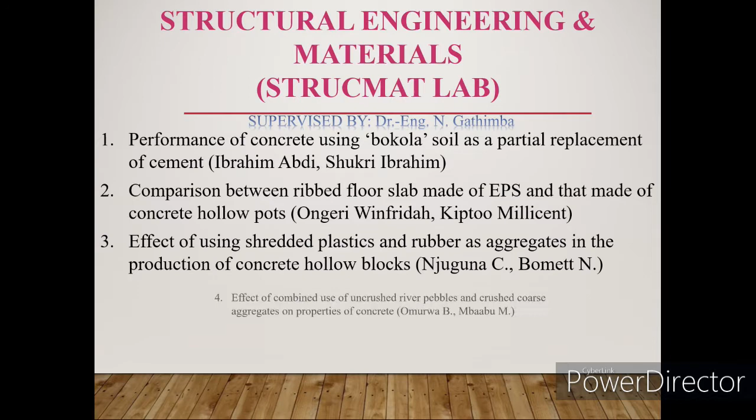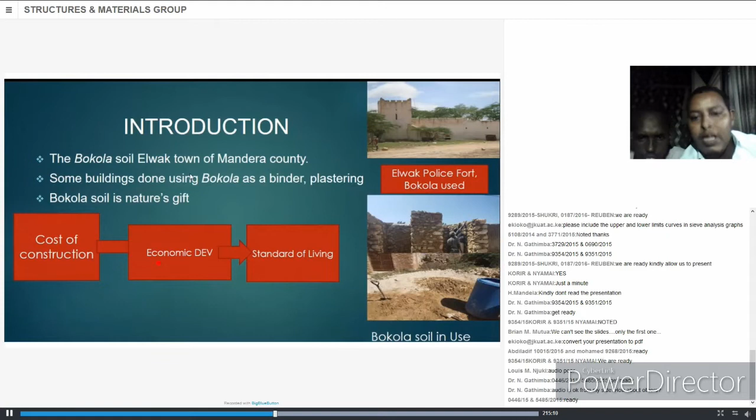Introduction: this is a local soil found in the Elwak town of Mandera County. The existing scenario is that some buildings, like the one on the right, were built using this soil as a binder. People also use it for plastering. This soil is naturally available, so we think it will reduce the cost of construction, leading to economic development, hence raising the standard of living.

Problem statement: some of the problems include the production and exploitation cost of cementitious material due to poor roads, and the cost in Mandera is twice that of Nairobi. Depletion of natural resources due to excessive use of cementitious material increases carbon footprint. Also, because people are already using this soil, there is a lack of specification and standardization for local material, so we needed to do proper tests.

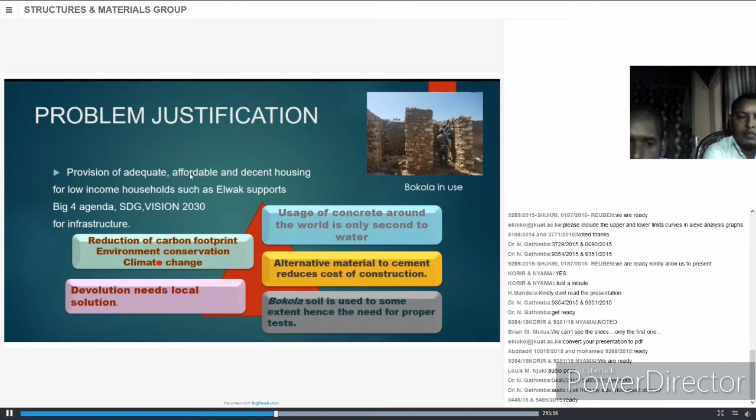The aim will be to increase... devolution also needs local solutions. Bokola is used to some extent, hence the need for proper tests.

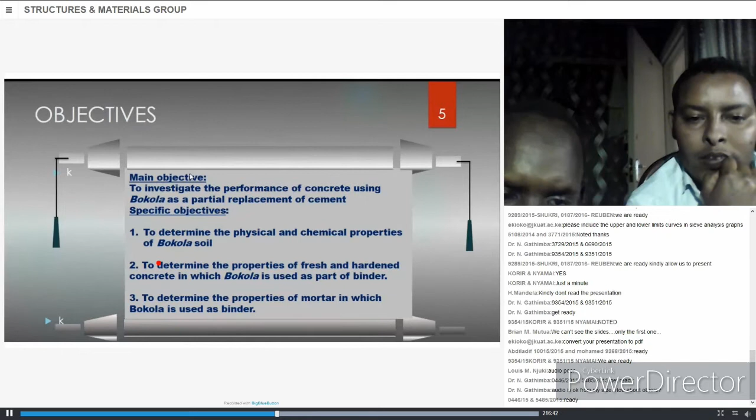Our main objective is to investigate the performance of concrete using bokola as partial replacement of cement. Specific objectives: one, to determine the physical and chemical properties of bokola soil. Two, to determine the properties of fresh and hardened concrete in which bokola is used as part of binder. Three, to determine the properties of mortar in which bokola is used as binder.

Our research questions: the first one is on strength. Does the concrete made of bokola attain the required strength within 28 days? To what extent can bokola be used in place of cement in making concrete? And economically, does the use of bokola make housing and infrastructure more affordable?

Our limitations: number one is on chemical analysis. We have not stressed much on the chemical analysis of bokola. We only tested for basic oxides, and the class of concrete is only limited to class 20 because of the new material, and the number of representative samples is minimized to from 0 to 20%.

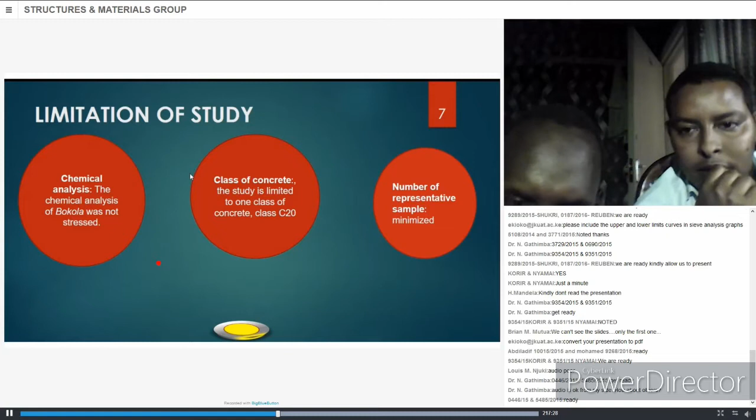Lime was also done as partial replacement of cement by other researchers. They replaced from 0 to 35% in concrete and 0 to 100% in mortar. The strength increased up to 15%, after which it kept on decreasing.

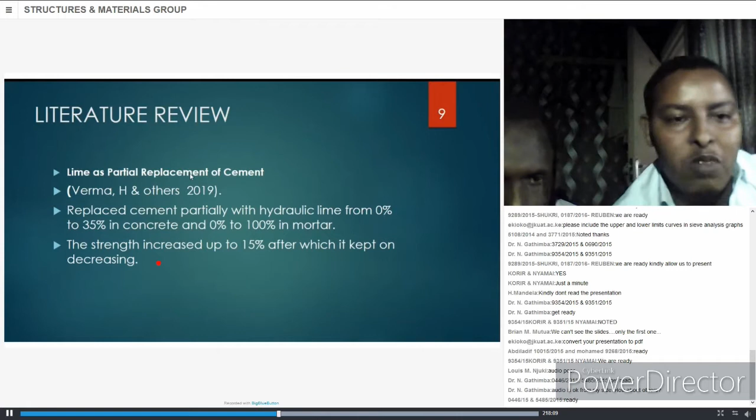Zeolite and tuff as partial replacement of cement were also studied. Researchers found that at 5, 10, and 15% of fine aggregates, 15% was successful, after which it wasn't.

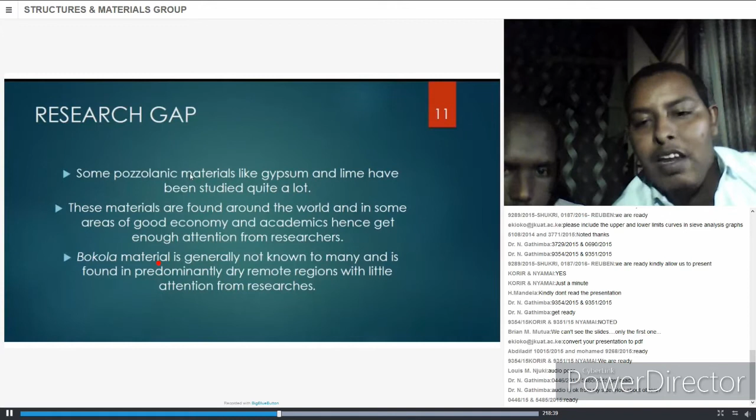Research gap: some pozzolanic materials like gypsum and lime have been studied quite a lot. We realize these materials are found around the world and in areas of good economy and academics, hence get enough attention from researchers. Bokola material is generally not known to many and is found in predominantly dry, remote regions with little attention from researchers, hence the need for a local solution from us.

Methodology: this is our roadmap. We started by collecting the sample and did a chemical analysis for basic oxides, after which we went to the properties of bokola. Here we did specific gravity, fineness, consistency, and setting time.

Then we did tests on mortar, and then on fresh concrete, where we did workability, especially the slump test. Then on hardened concrete, we did compressive strength, tensile strength, density, and water absorption. And at the end, we did analysis and comparison.

Now on to results, data analysis and discussion. The chemical composition of this bokola soil was analyzed using an XRF test. We realized that it contained a very large amount of sulfur, 43.8%, against cement's 1.9%. This high amount of sulfur, unusual in cement, could be from calcium sulfate, making this material closer to gypsum than cement really.

It contains a good amount of calcium oxide, 35% against cement's 42%, and silica 15% against 40%. These two compounds are very important in cement because they bring the binding effect, and the silicon and aluminum produce a firm and hard mass, hence the strength development.

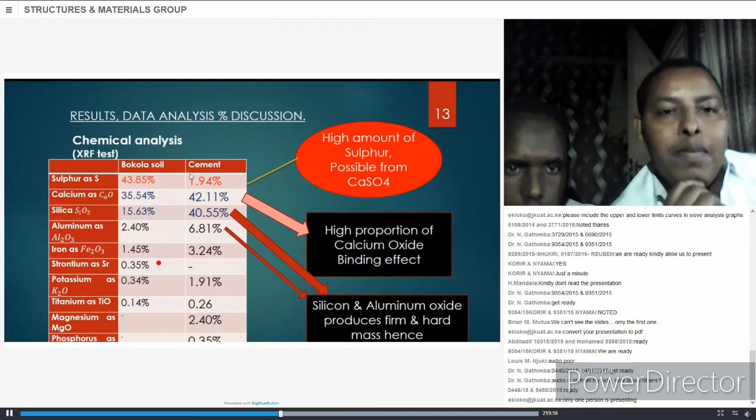Properties of bokola soil: we did the standard consistency test and realized that bokola required 227 milliliters of water to reach consistency, against the same amount of cement requiring 120. This means bokola needs more water than cement, and is more plastic.

Setting time: the initial set for cement is 150 minutes, bokola is 307. Final setting for cement is 295, the other one is 582 minutes. Although both satisfied the ASTM requirement of not less than 45 minutes and not more than 10 hours, we realized bokola needed more time to settle, because of less calcium oxide and less silica. This means less hydration and fewer reactants.

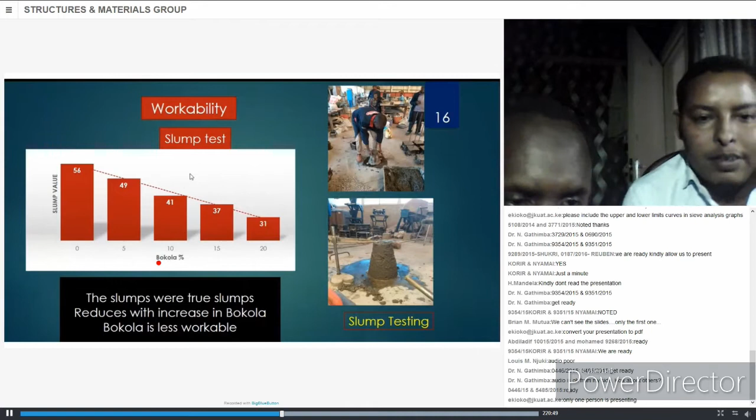Workability: the workability of concrete in which we use bokola reduces. The slumps were true, but the reduction may be due to the consistency of bokola, which needs more water to be consistent.

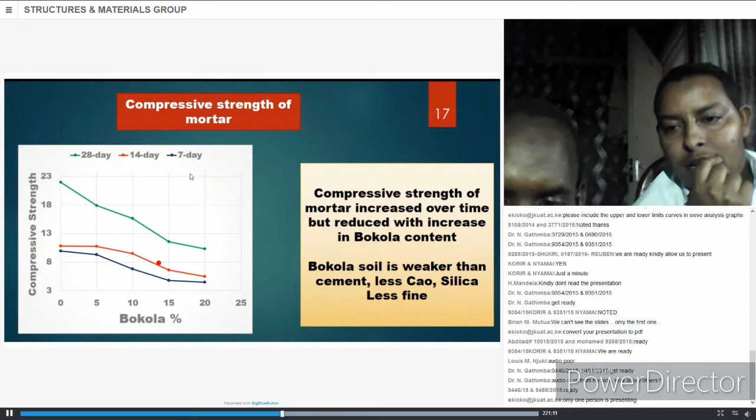Compressive strength: the compressive strength of mortar also increased with time, but reduced with increase in bokola content. Bokola is weaker than cement due to less calcium oxide and silica, and it is also less fine.

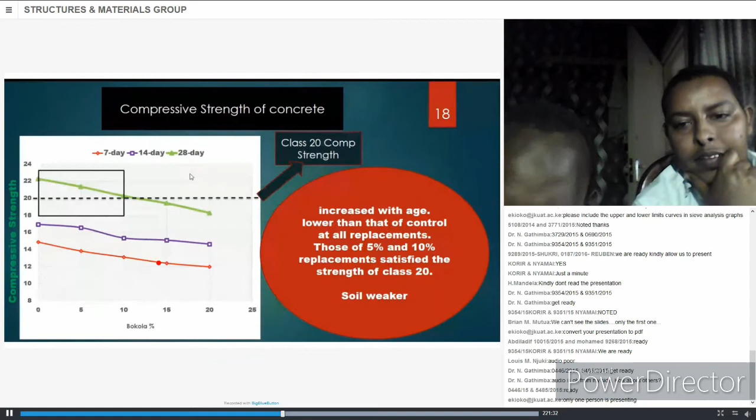The compressive strength of concrete also reduced with increase in bokola content, but increased with time and age. It is lower than that of the control at all replacement levels. Those with 5 and 10% replacement satisfied the strength of class 20, which shows the bokola soil is weaker.

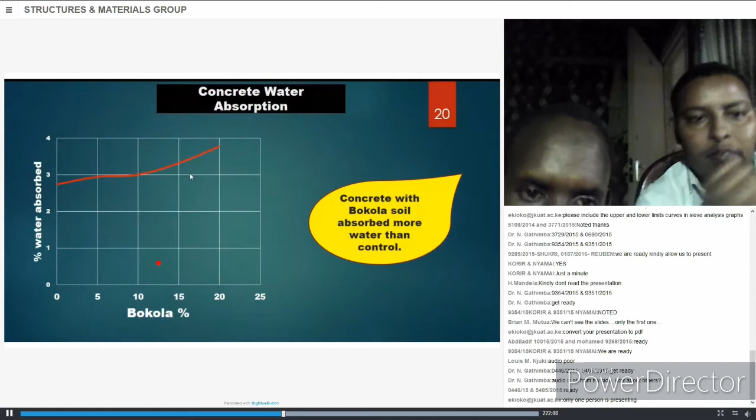Onto conclusion and recommendation. Based on objective number 1, we concluded that bokola soil contains elements of cement and can show comparable properties. This includes setting time and fineness, all of which we showed the values for. Bokola mortar also had compressive strength reaching up to 17 newtons per square millimeter, which is generally good.

The use of this material can make housing more affordable, especially in large projects. The compressive strength when this material is used as a binder is okay up to and including 10% replacement.

Onto recommendations: based on this study, we recommend cement replacement with this material up to 10%. We also recommend it be used as a binder and filler because of its bonding effect. Since people are already using it for plastering, we think it's okay to continue, but we recommend using bokola material as a retarding admixture because this soil is found in areas of high temperature, so we need to use it to slow the setting of cement due to high temperature. We also recommend a future study for use in structural elements.

Let's get the comment from the panel members. There was a comment by Engineer Kioko, or it was an observation: the presentation was dominated by one person, so I hope you rectified that towards the end. I have one observation. I can comment that they have quality presentation slides. Yeah, their presentation is good. Thank you, sir.

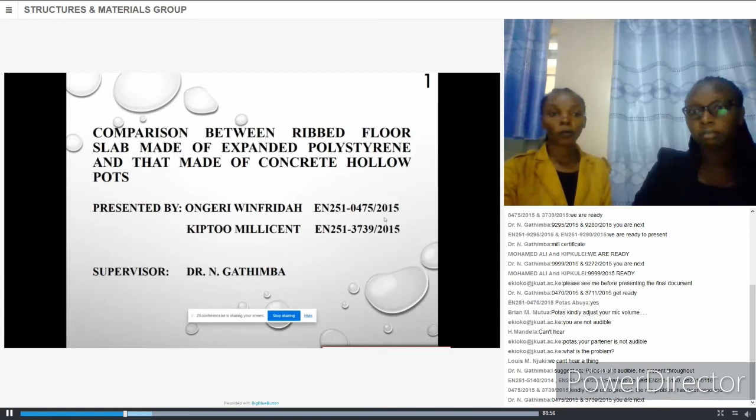My name is Kiptoo and she's Ongeri, and our project title is Comparison Between Ribbed Floor Slab Made of Expanded Polystyrene and That Made of Concrete Hollow Pots. Background study: in order to reduce the dead load in the rib slab, use of lightweight material in construction is necessary, such as concrete hollow pots and EPS, as shown below. Here is an example of an EPS floor slab, and to your left you can see an exact slab.

Problem statement: due to the increase in dead load from using concrete hollow pots in the rib slab, it leads to increased load-bearing element sizes, which may lead to increased cost of the overall building. In order to curb this problem, we use lightweight material, hence reducing the sizes of the load-bearing elements and the amount of concrete and reinforcement required.

For our objectives, the main objective is the comparison between EPS and that made of concrete hollow pots.

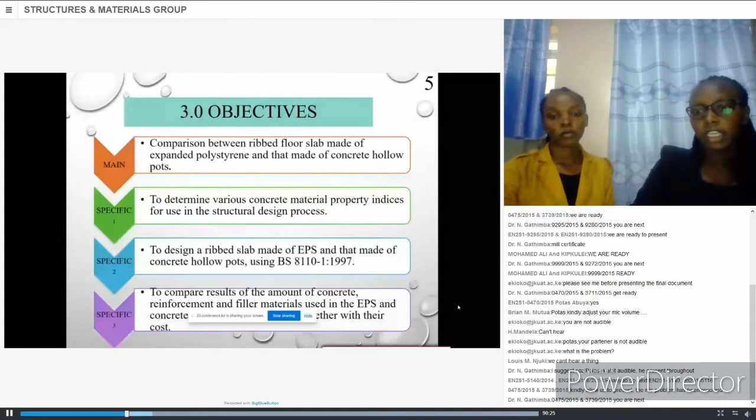The limitations encountered were that only one size of concrete hollow pot was factored in, only one slab thickness and class 25 concrete was used, and the cost of labor and transport were not covered.

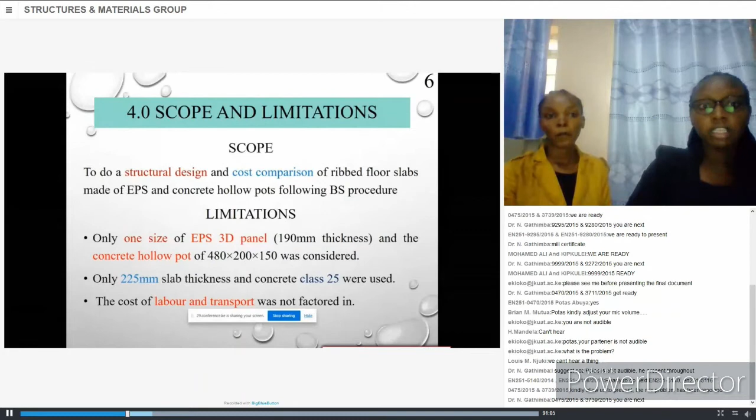For the research gap, however, there is no study comparing the EPS and the concrete hollow pots.

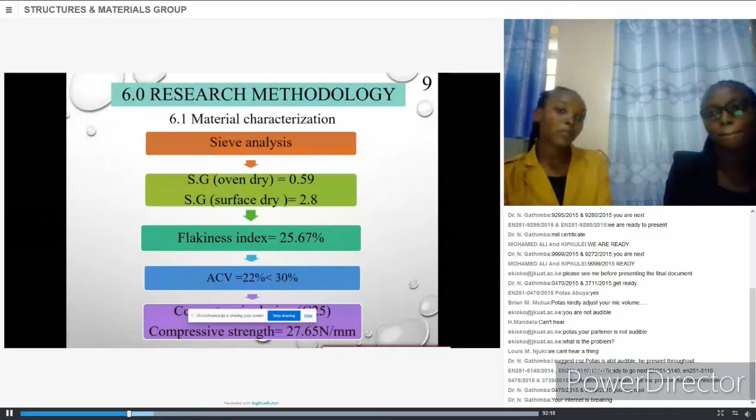For the research methodology, we did the sieve analysis, specific gravity, flakiness index, and strength of class 25 concrete, found to be 27.65. In our design of rib slabs with EPS and concrete hollow pots, we calculated the shear force, and the reinforcement provided for EPS was 1T16 top and 1T10 plus 1T12 bottom, while for the hollow pots it was 3T10 top and 2T12 bottom.

For the results, the expanded polystyrene had a density of 15 kg per cubic meter, and the hollow pot had a mass of 17.6. For the reinforcement...

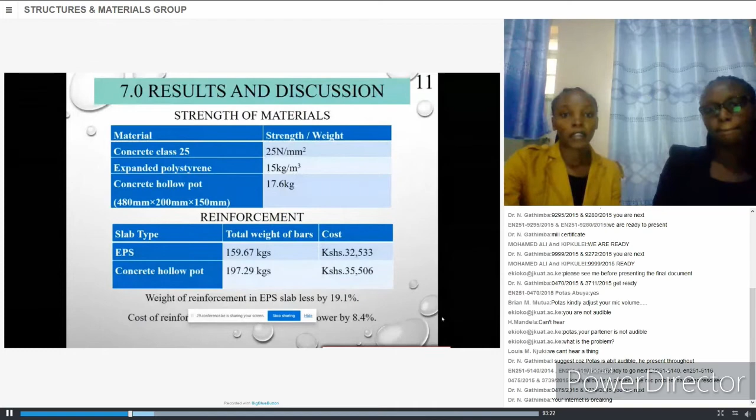The reinforcement was less by 19.1%, and the cost of EPS was lower by 8.4%. The volume of concrete in EPS was 0.3%, and the cost of EPS in the slab was less by 15.7% compared to the total cost, though the total cost of EPS was higher by 62.8%. In conclusion, the properties were satisfactory.

The rib slab design was also successful using the BS codes. The overall cost of using EPS was 112,000, while that of using hollow pot was 87,000. Due to the high cost of EPS panels, the cost of slab construction will be higher.

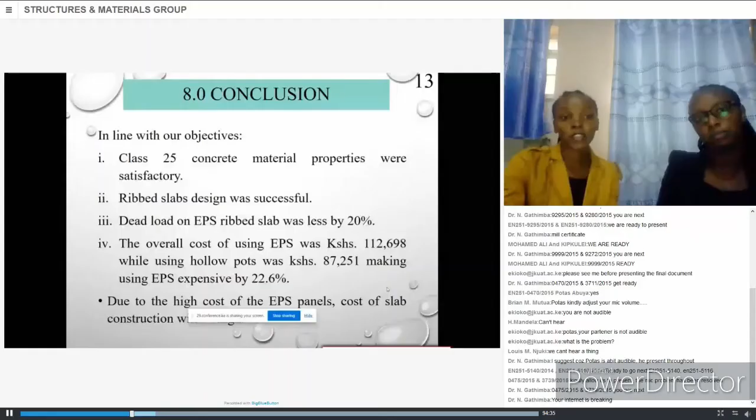We recommend that when using EPS and concrete hollow pots as filler material for slabs, one should know the overall loading and cost of each in calculating the total, in order to know the precise total cost.

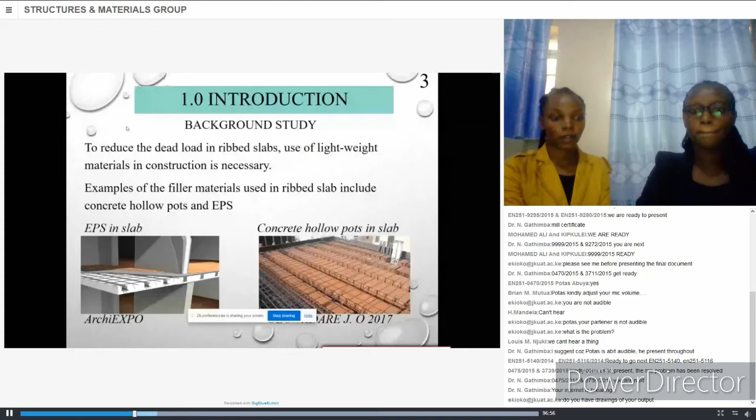Yes, we do. We have the drawings. It's in the main document. Okay, and then there is a question by Engineer Mutua.

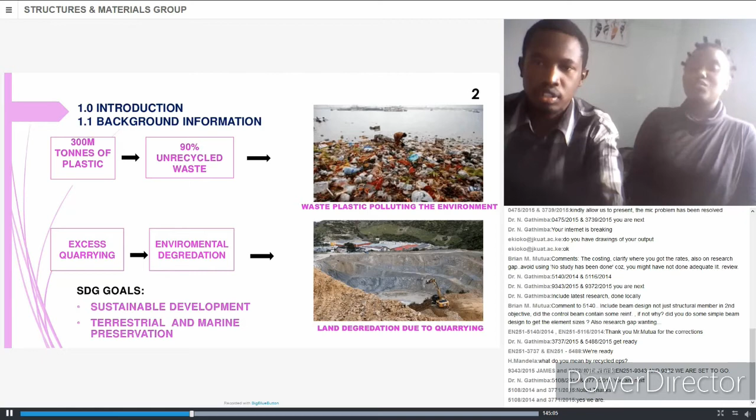All this is not in line with our SDG goals, which are to promote sustainable development and terrestrial and marine preservation. Currently in our country, Kenya, in 2018 we had a housing deficit of 2 million housing units, and this number grows by 250,000 units every year. So we have a deficiency in housing, a pollution menace, and a degrading ecosystem.

So how do we move from this to sustainable development and a clean environment? Plastic rubber hollow blocks could be a solution to this, because we are using recycled materials which otherwise would pollute our environment, and also providing cheaper housing.

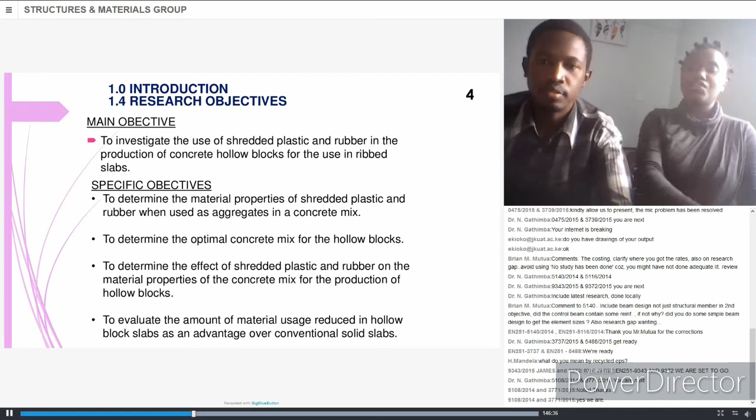Our main objective is to use shredded plastic and rubber in production of concrete hollow blocks for use in rib slabs. Our specific objectives are to determine the material properties of shredded plastic and rubber when used in the concrete mix for hollow blocks, and to determine the optimal concrete mix for the hollow block. Then we determined the effect of shredded plastic and rubber on the material properties of the concrete mix itself. And afterwards, we evaluated the amount of material usage reduced in hollow blocks as an advantage over conventional solid slabs and control mass concrete hollow blocks.

Normal hollow blocks use concrete, with stone and sand aggregate. Over the years, there have been other projects that have tested the use of plastic, glass, and rubber in the production of hollow blocks. So our project is conducting a full replacement of the aggregates with plastic and rubber.

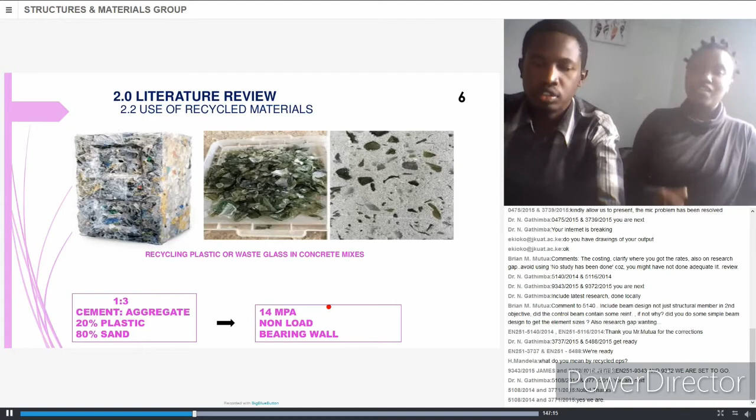On our methodology, we were testing the specific constituent materials, that is plastic, conducting sieve analysis and specific gravity. Afterwards, we designed a concrete mix with varying proportions of the aggregates, that is, for example, 70% rubber and 30% plastic, 60% rubber and 40% plastic, then a 50-50 mix, and the reverse with 70% plastic and 30% rubber. And then we had tests on the concrete.

On the concrete itself, we conducted the slump test, the compressive strength test, and flexural test in line with the standards. And then we had tests on the hollow blocks after we achieved the optimal mix. So we conducted the moisture absorption and compressive strength tests on the hollow blocks themselves. And afterwards, we designed a ribbed slab containing the rubber-infused plastic hollow block and also the control hollow block.

Once we obtained our materials from the industrial area, we conducted a sieve analysis and specific gravity test on the various particles, rubber particles and plastic particles, so that we can understand the aggregation. The rubber aggregate showed a representation of finer aggregates, whereas the plastic aggregate showed a larger representation of coarser or larger sized particles, and the maximum sieve size was 10 millimeters. The specific gravity of rubber was 1.15, and that of plastic aggregate was 1.08.

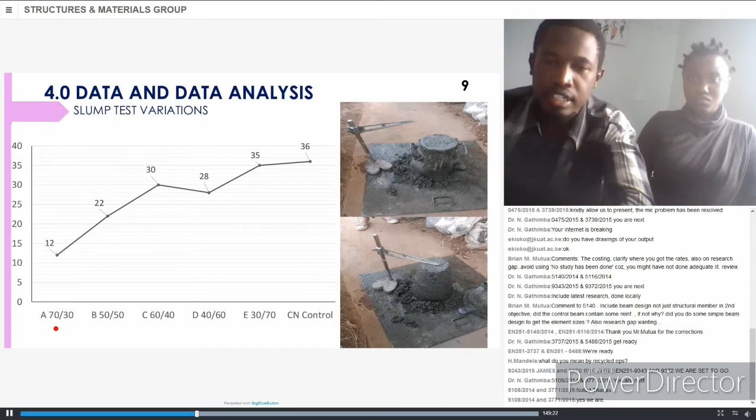So we did mix design and varied the proportions, the ratios of rubber to plastic, and the highest compressive strength was obtained with the mix that had 30% rubber and 70% plastic. Also, the 40-60% rubber to plastic ratio met the threshold provided by the Kenya Standard KS 02-625/1983, which sets a minimum of 2.8 Newtons per millimeter squared for non-load bearing blocks.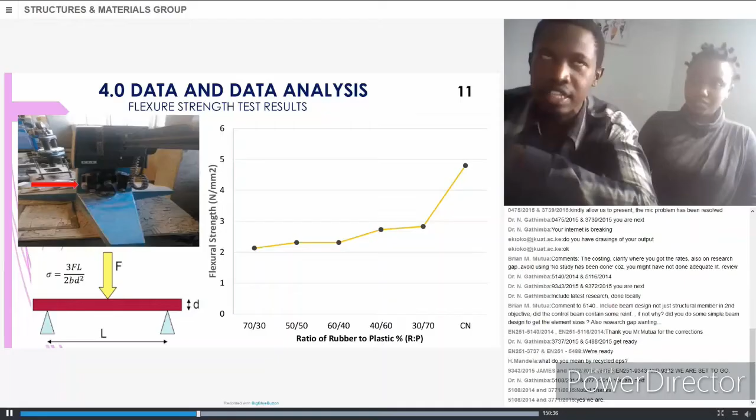So based on the unit weight of the hollow blocks, we did a comparison of concrete hollow blocks and the plastic rubber hollow block. The plastic rubber one weighed 16.5 kilograms and the concrete hollow block weighed 24.7 kilograms. As for the cost of the materials, when we evaluated the cost of each constituent material, we got 164 shillings for the plastic rubber and 155 for the concrete hollow block.

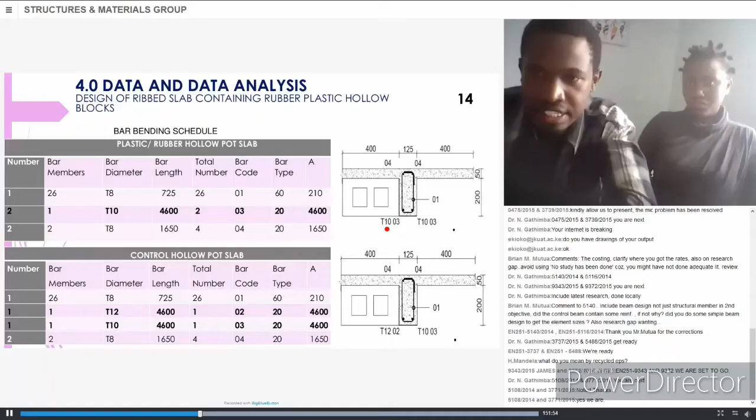Based on the unit weight, we also did a design of a rib slab containing rubber plastic hollow block, and according to the area of steel required for the design, we found a difference: T10 on the rubber plastic hollow block and T12 on the concrete hollow block. So the difference is that there are 2 T10s at the bottom, versus 1 T12 and 1 T10 at the bottom of the concrete hollow block slab.

So there's a saving on the material usage when you use a plastic rubber hollow block, which is lighter in weight compared to the concrete one. One minute remaining.

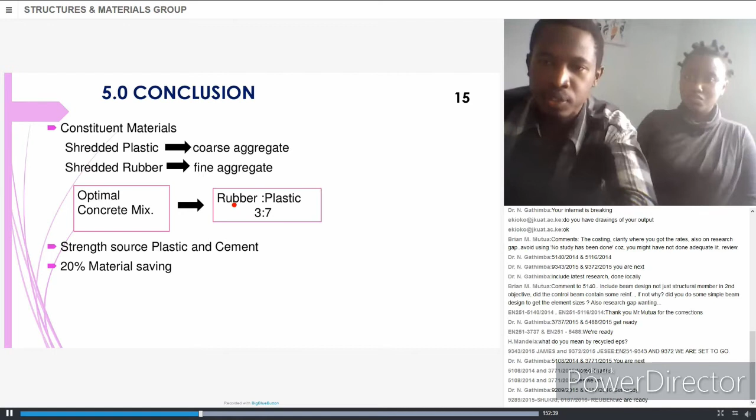As I conclude, we found out that the shredded plastic performed as a coarse aggregate since it had relatively larger particles compared to rubber, which had relatively finer particles. The optimal mix for the rubber plastic combination had a ratio of 3 to 7, or 30% rubber and 70% plastic. The major strength was sourced from the plastic and the cement, as exhibited by the results, and 20% of material saving was witnessed, as shown in the area of steel required versus the steel provided in the slab design.

We recommend that in future studies, concrete class can be varied, and production techniques can also be varied—that is, the extent of vibration when preparing the hollow blocks—and a weight and cost reduction analysis of an entire structure based on the unit weight of the rubber plastic hollow block.

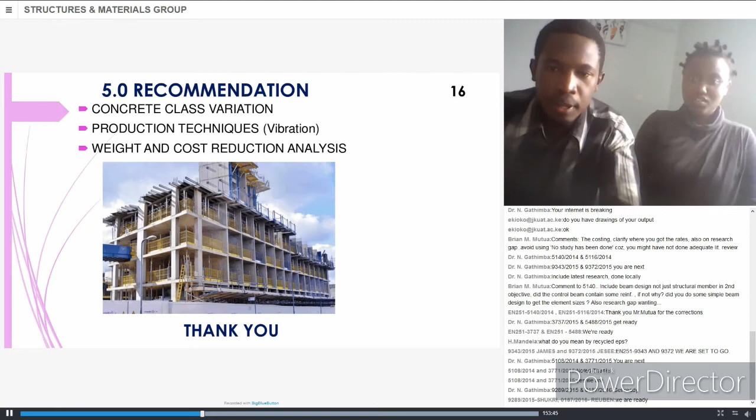Okay, I have a question. In the sieve analysis, you've shown us the gradation curves. Did you check whether they are falling within the limits required? No, we did not. This is because the grading is directly related to how the plastic material was prepared and also the rubber material was prepared. Each batch has a different curve because it depends on how they were shredded and the millimeter size used. So what was the essence of grading?

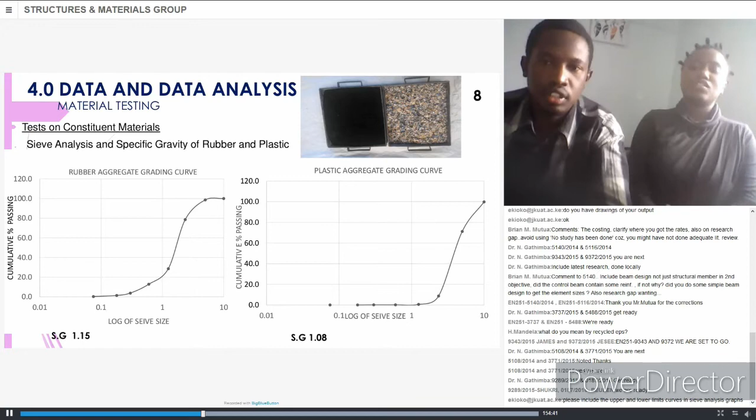The essence was for the design, for mix design, to know how we can get a specific class of concrete. It was used in the concrete mix design.

Okay, though you should find out and try to understand why the grading matters and why it should fall within the curve. Thank you. You can see—sorry, I have muted you.

You can see the same comment from Engineer Kioko: include the upper and the lower limit in the sieve analysis graphs, so that you can tell us whether it's falling within the grading. I don't want to comment further, so please observe the comment by Engineer Kioko and Engineer Mandela.

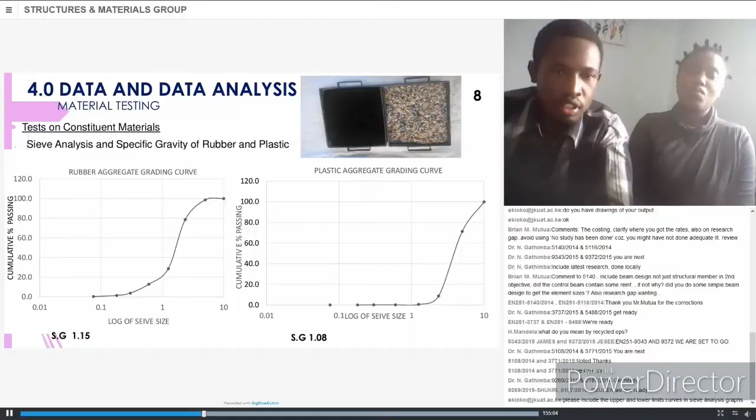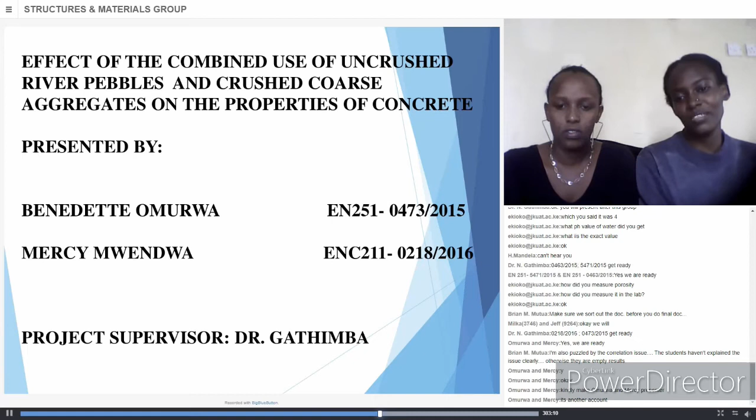Our project was on the effect of the combined use of uncrushed river pebbles and crushed coarse aggregates on the properties of concrete. The project was conducted by myself, Benedette Omurwa, and my partner, Mercy Mwendwa, and our supervisor is Dr. Gathimba. On to the next slide.

Problem statement and justification: crushed aggregates present the advantage of higher strength because of their high bond strength, but they present the disadvantage of requiring more paste because they have higher voids and poor workability. On the other hand, river pebbles, because of their smooth texture and rounded shape, present high workability, but the disadvantage is poor interlocking.

The disadvantage is they present poor interlocking and weak bond strength, resulting in low strength. So an optimal combination of both will result in a mix with high strength and requiring less work.

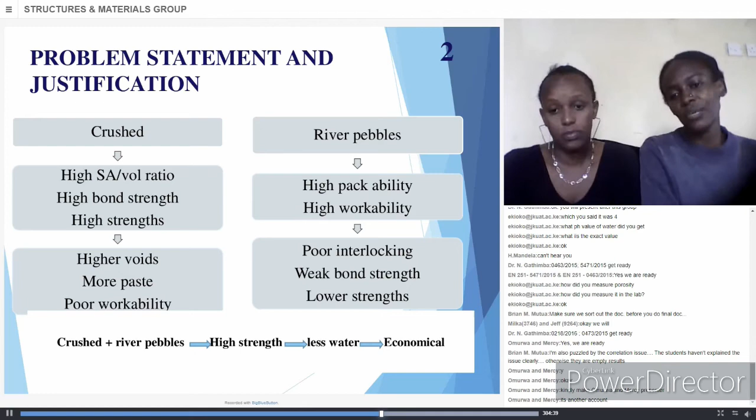Onto our objectives. The main objective was, as per our topic, to investigate the effect of the combined use of uncrushed river pebbles and crushed coarse aggregates on the properties of concrete.

The specific objectives: the first was to compare the physical and mechanical properties of both the uncrushed river pebbles and the crushed coarse aggregates. The second was to determine the properties of fresh and hardened concrete made from the combined use of the two aggregates. The third was to determine the correct mix design and establish the optimal mix from the pebbles and the crushed coarse aggregates.

The scope: after collecting our materials, we did the comparison of the material properties, and then we did concrete testing on both the fresh and hardened concrete. After determining the optimal mix, we cast a beam from the optimal mix. The pebbles used are, as per the slide, the yellow pebbles and the black pebbles.

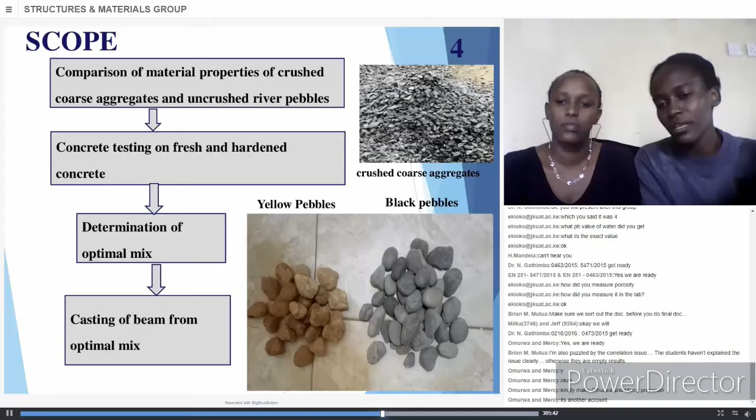The limitations of the project: we only had one concrete class. We measured the material characteristics and there was less focus on the structural behavior of the uncrushed river pebbles.

On the literature review, previous studies were conducted on the combined use of various aggregates, but the major focus was on gravel, and we aimed to focus on the use of pebbles in construction, especially in Kenya.

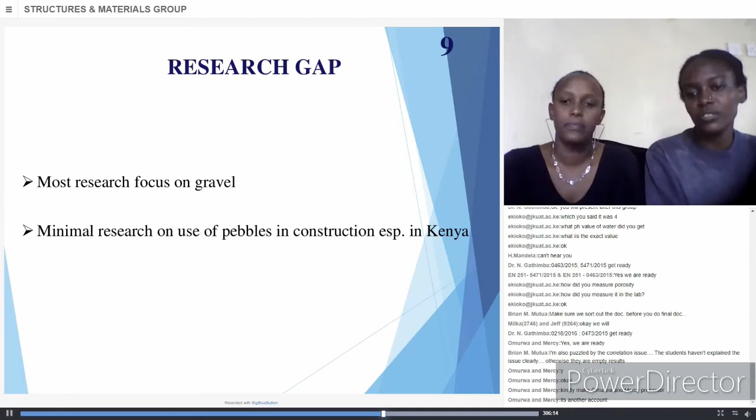Our methodology: from our objective, we determined the properties of coarse aggregates. Then we determined the properties of both fresh and hardened concrete, and from the optimal mix, after mixing, we determined the flexural strength by casting the beam.

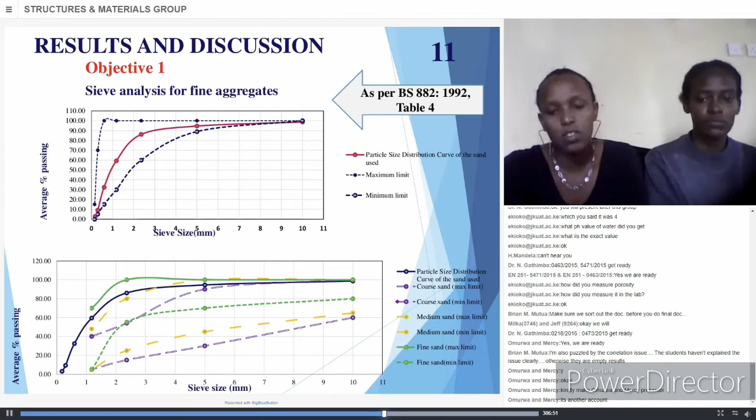From the sieve analysis, the sand was within the envelope and it was good to produce a quality concrete. From objective 1, the sieve analysis of the aggregates, that is coarse aggregate, crushed coarse aggregate, and uncrushed river pebbles, the particle distribution was good and they fall within the envelope.

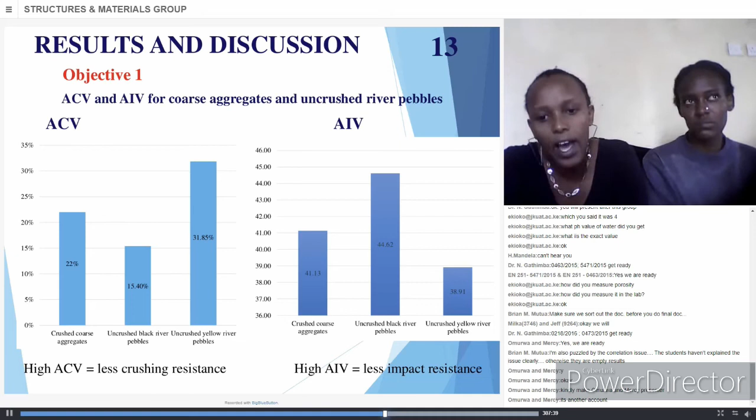From objective 1, for the properties, the ACV for the yellow pebbles was high, meaning it had less crushing resistance. For AIV, the uncrushed black pebbles also had a high AIV, meaning it had less impact resistance.

The crushed aggregates, that is the coarse aggregate, were more flaky from our results, and the black pebbles were less flaky, followed by the yellow pebbles.

For our workability, the mix with a higher amount of the black river pebbles was more smooth, with high packability and a high slump. As the quantity of pebbles reduced, the slump was reducing.

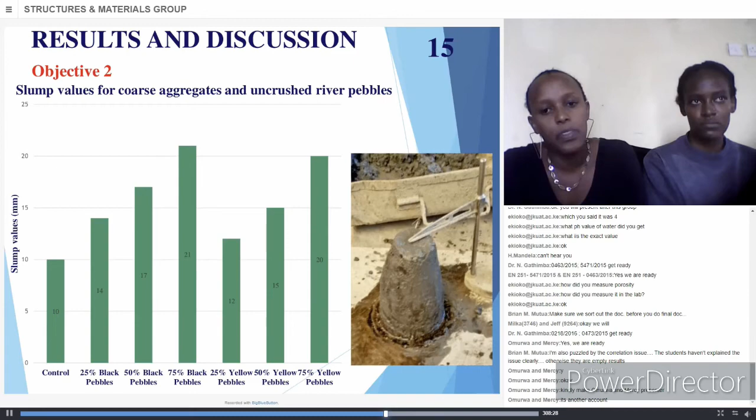For the failure mode, from objective number 2, on the properties of both hardened and fresh concrete, the mode of failure was that after the center point loading, the crushing was explosive and columnar, which was satisfactory.

From the optimal mix that we cast the beam with, for the flexural test, the control mix had a wider crack, while for the 25% mix with maximum strength, the crack was less wide, meaning they can still be incorporated in structural elements.

For compressive strength, it was reducing from the control as black pebble content increased, with the control at a compressive strength of 31. The 25% river pebbles mix had the maximum compressive strength, and that's what we used for casting the beam from our objective.

That is objective number 3: we cast the beam using the optimal mix.

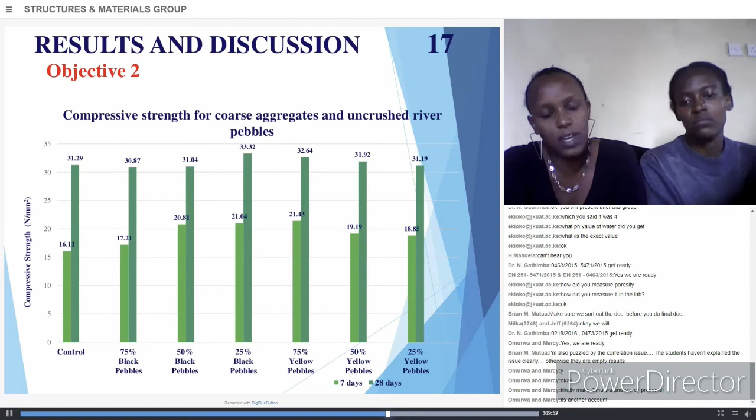Conclusions and recommendations: from our first objective, comparing the properties, we found that the material with the greatest resistance to crushing was the uncrushed black pebbles, with the greatest resistance to impact being the uncrushed yellow pebbles. The highest specific gravity was the uncrushed black pebbles, and the most flaky was the crushed coarse aggregates.

Our recommendations: we recommend the use of uncrushed river pebbles as a partial replacement for crushed coarse aggregates in construction, and further research should be done using crushed river pebbles instead of uncrushed ones.

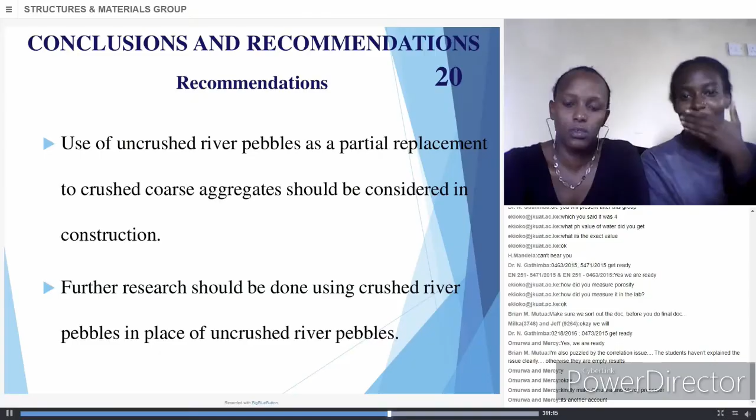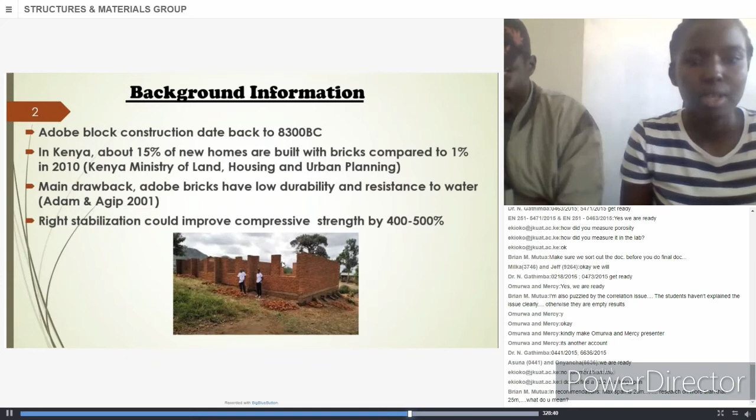We're going to present on the study of stabilized adobe blocks prepared using bagasse fiber and corn cob ash as partial replacement for cement. Our background: adobe blocks have low durability and poor resistance to water, hence the need to improve the block.

Our problem statement: adobe blocks have been used previously for construction of temporary structures due to their low compressive strength and capacity and their resistance to water. So we are trying to improve the adobe blocks so that we may be able to construct permanent buildings, since the cost of construction is lower and it leads to providing shelter for the growing population in general.

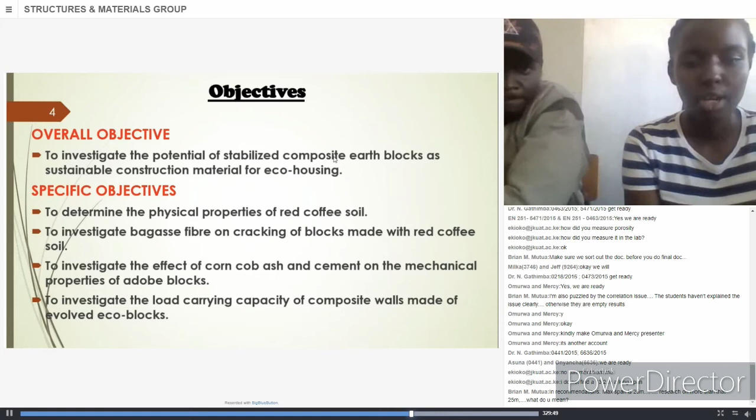Our overall objective is to investigate the potential of stabilized composite blocks as a sustainable construction material for eco-housing. Our specific objectives are to determine the physical properties of red coffee soil, investigate bagasse fiber on cracking of blocks made with red coffee soil, and investigate the effect of corn cob ash and cement on the mechanical properties of adobe blocks, which will result in the investigation of the load carrying capacity of composite walls made of the evolved eco blocks.

Our research gap is that there has never been any study on corn cob ash used together with bagasse fiber as a soil stabilizer. That's why we're investigating the effect of corn cob ash and bagasse fiber on the compressive strength of compressed earth blocks.

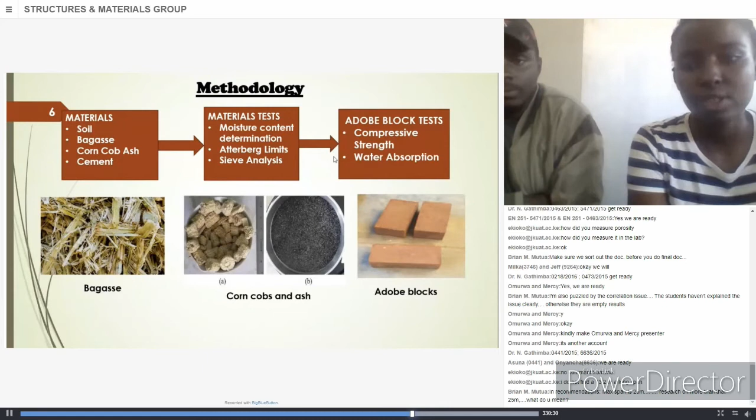Our methodology: the materials required are soil, bagasse fiber, corn cob ash, and cement. The soil tests included moisture content determination, Atterberg limits, and sieve analysis. Our block tests were conducted according to BS standards, and now on to our results.

We got the results. There's a composition of the block mixture that we used for block production.

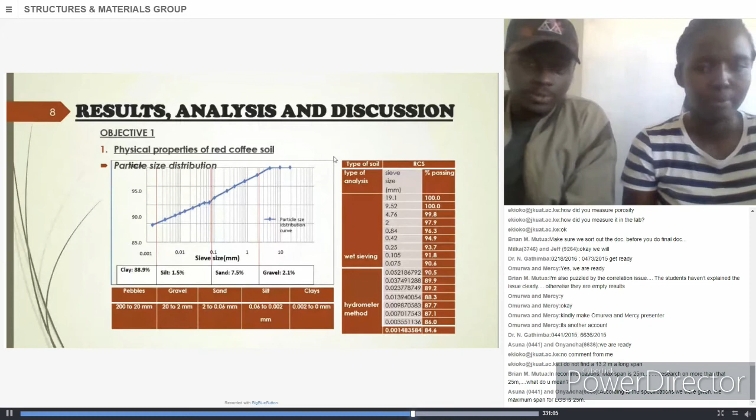We aim to fulfill our objectives as stated above. For the first objective, which was to determine the physical properties of the red coffee soil, we conducted particle distribution sieve analysis using wet sieving, to classify the soil, which we later classified as clay as it contains 88.9% of that content.

The next table shows the other physical properties of the red coffee soil summarized in one table, giving the moisture content, liquid limit, plastic index, which I'll comment on later, the linear shrinkage, the dry density, as well as the optimum moisture content.

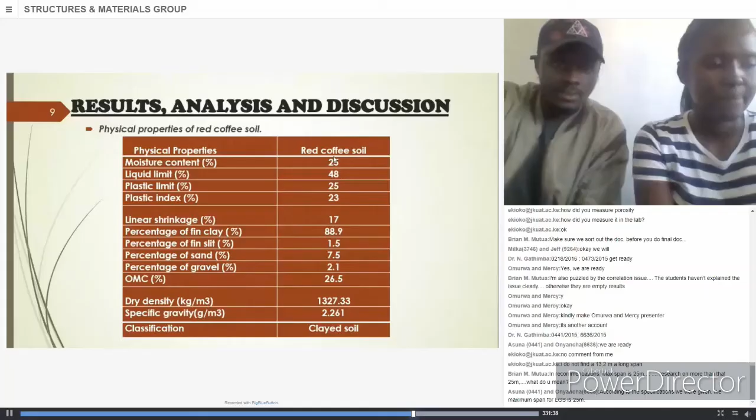For objective number 2, we move to the linear shrinkage, where we selected blocks made from the compositions shown earlier. As you can see, the number of cracks and the linear shrinkage decreased as we introduced or added corn cob ash and bagasse. We also observed there was no cracking on addition of cement.

For our next objective, objective number 3, we tested the blocks to determine compressive strength. In this section we had two variables, cement and corn cob ash, as the main materials to vary. The table shows the red soil compressive strength without any stabilizer, as well as with cement in different proportions, 5% and 10%.

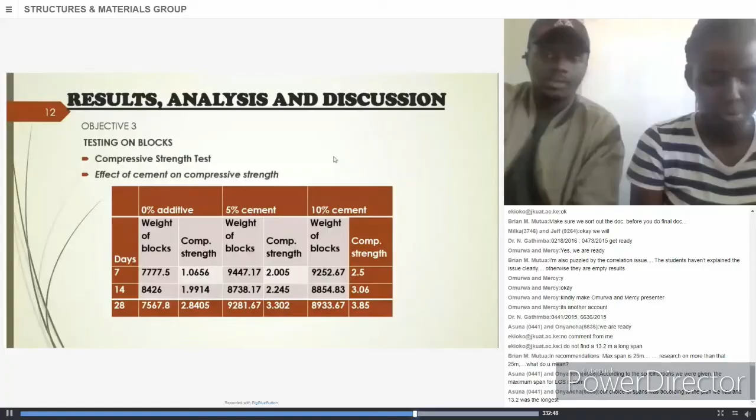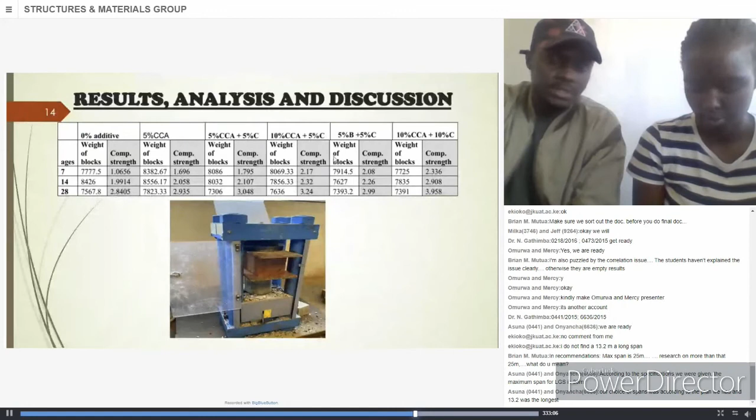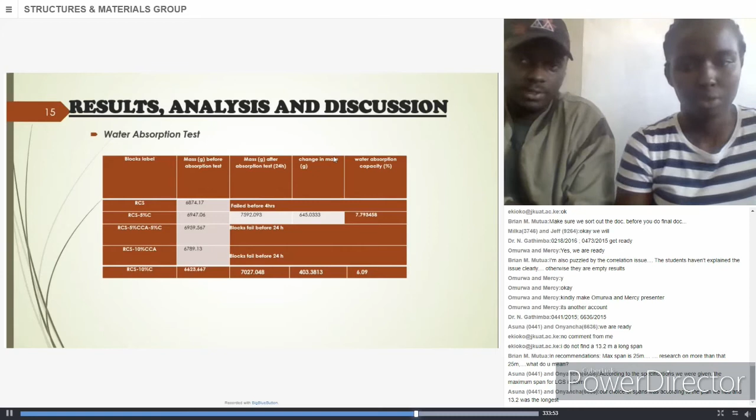For the water absorption test, the unstabilized red coffee soil failed before 4 hours. Only the blocks with added cement were able to sustain after 24 hours, and that's how we determined the water absorption capacity of the block.

Let's go to objective number 4, where we were supposed to test on a wall panel. Here we constructed 3 walls: one with unstabilized block, one with stone block from Darugo, and the other with stabilized red soil block.

Finally, we did a cost comparison between the blocks we made, one being the RC, which had the highest compressive strength, and compared it to the conventional block, the stone block from Darugo. The cost for construction of the brick was lower, at 2,026 per meter squared of wall, while the conventional came at 3,000.

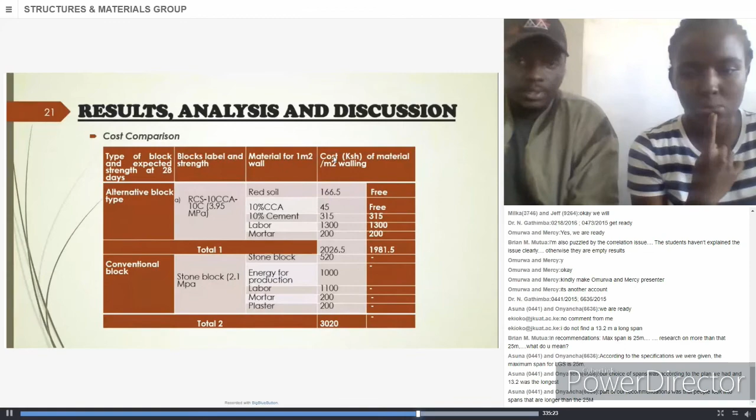To our conclusions, the different stabilizers used had improved structural properties on the earth blocks. The addition of cement, corn ash, and bagasse fiber to the red soil reduced the number of cracks and the amount of shrinkage. The addition of 5% corn ash to the red soil improved the compressive strength of the block from 2.8 to 2.9 megapascals, and with a further addition of 5% and 10% cement, it increased up to 3.95 megapascals.

The compressive strength of the stabilized earth block was higher than that of the block walls from Darugo.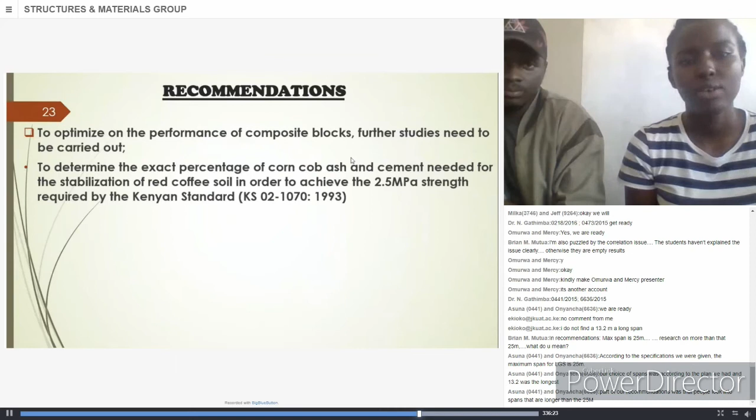Our recommendation is that, so as to optimize the performance of composite blocks, further studies should be carried out to determine the exact percentage of corn cob ash and cement needed to stabilize the red coffee soil, so as to achieve 2.5 megapascals.

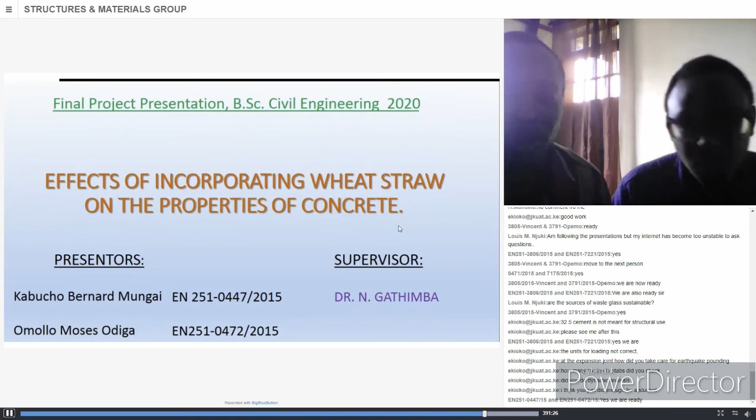On the content, we have introduction, problem statement, objectives, scope, limitation. We will go to literature review, methodology, results, and discussion. Then we'll summarize with conclusions and recommendations.

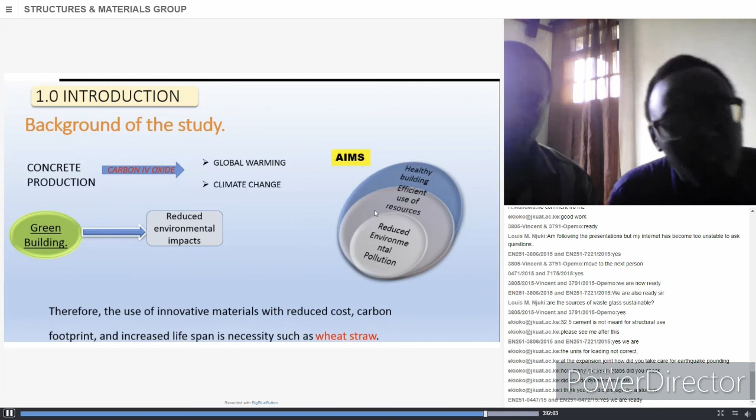Now to the background of the study. Concrete is the most widely used material in the construction industry. A research published in 2019 by a journal by the New York Times said that concrete production leads to about 10% of carbon production. Therefore, if we adopt green building technology, we shall help minimize this carbon footprint, and also use this material in production so as to improve on structural design.

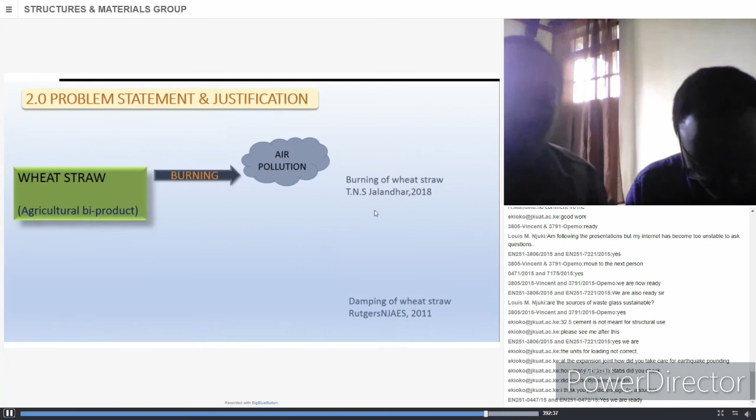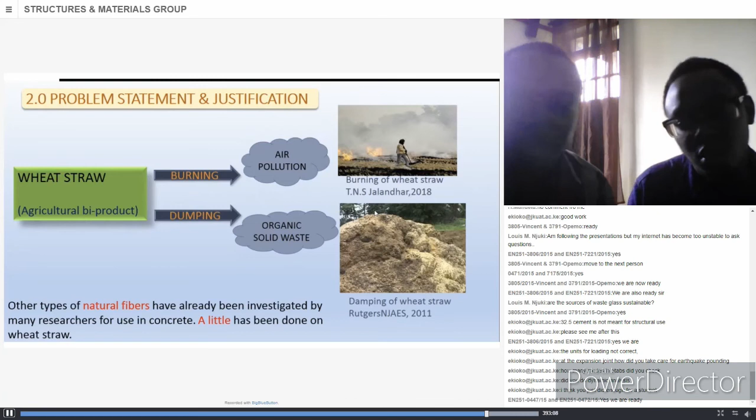So in order to minimize this, it can be incorporated in concrete, and according to studies previously done, it can also improve the tensile strength and flexural strength of concrete. Now to objectives, the main objective is to study the effect of using wheat straw as a material in concrete production.

For the specific objectives, we want to see the suitability of wheat straw. How shall we achieve it? First, we shall determine the effect of wheat straw content on the workability of fresh concrete. Then we shall determine the physical and mechanical properties of wheat reinforced concrete.

This is where we test for compressive strength, flexural strength, and split tensile strength. Finally, we need to see the optimum quantity of this straw, which when incorporated for reinforcement in concrete, helps achieve the best results.

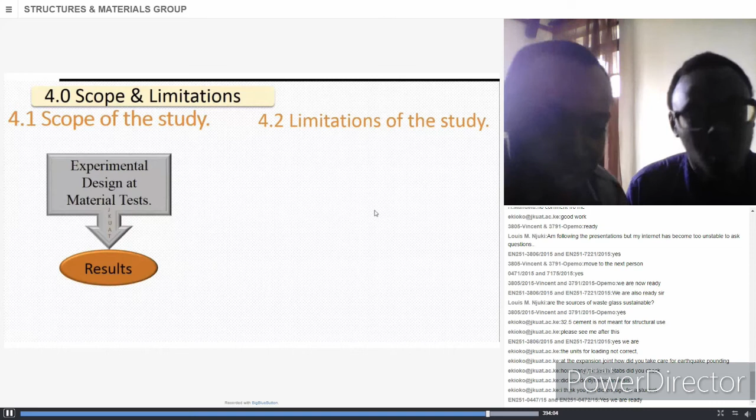For the scope of the study, it involved the experimental design and lab tests, which were done at the JKUAT materials lab. Thereafter, under limitations, we had the inability to quantify the reduction in the carbon footprint as a social limitation, and a lack of ability to perform the durability test.

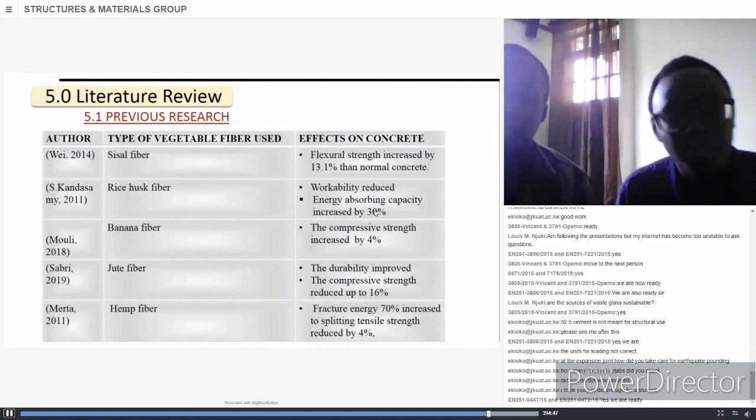And now to the literature review. This table shows us some of the work done on vegetable fiber. For example, sisal fiber has been incorporated in concrete. We have rice husk, we have banana fiber, we have jute fiber, we also have hemp fiber. There are other vegetable fibers also which have been incorporated in reinforcement of concrete.

But then little has been done on research. There have been research done on the application of rice husk fiber, sisal fiber, and other types of fiber, and also a little has been done on wheat straw and even on its application. When we look at rice husk, it has been applied in terms of fiber and other forms such as the ash. But when you look at wheat straw, the material itself, it's least applied in concrete making.

For the methodology, we did material collection where we collected fine aggregate, the wheat straw fiber itself, and the coarse aggregate, where we did preliminary tests on the coarse aggregate, the river sand and the coarse aggregate. We did sieve analysis first, then we went to main tests, which were done on both plain and reinforced concrete. On the fresh concrete we did a slump test, and on the hardened concrete we did tensile, compressive, and beam flexure tests.

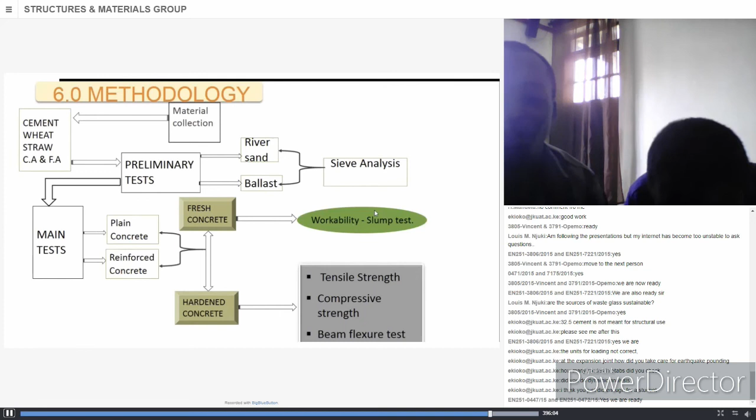Now to the compressive strength, it was observed that there was a decline in the compressive strength as tested at 28 days, 14 days, and finally 7 days. This decrease is attributed to the increase in water content, which disrupted or interfered with the matrix of the concrete mix. Thus, workability was observed to increase and compressive strength was observed to decrease.

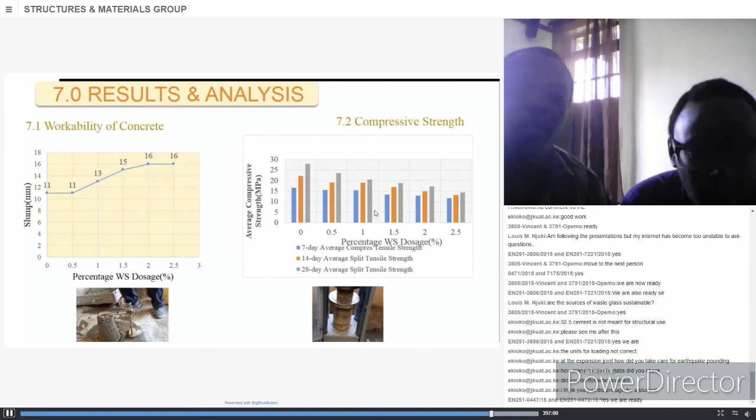The next result was on split tensile strength, where there was an increase as we continued to increase the percentage dosage of wheat straw in the concrete matrix. There was an increase from plain concrete to 0.5% dosage, then there was a decline, then there was an increase from 1% dosage to 2.5%. This can be attributed to the increase in bond strength from the addition of wheat straw dosage, but it goes up to an optimum until 0.5%, after which there is no significant bonding effect of wheat straw on the concrete matrix.

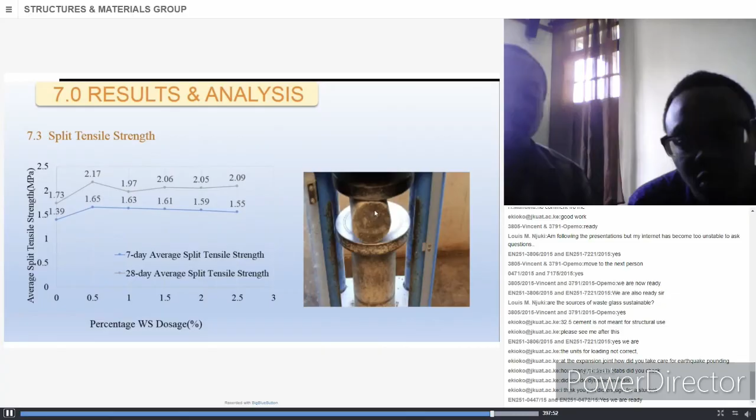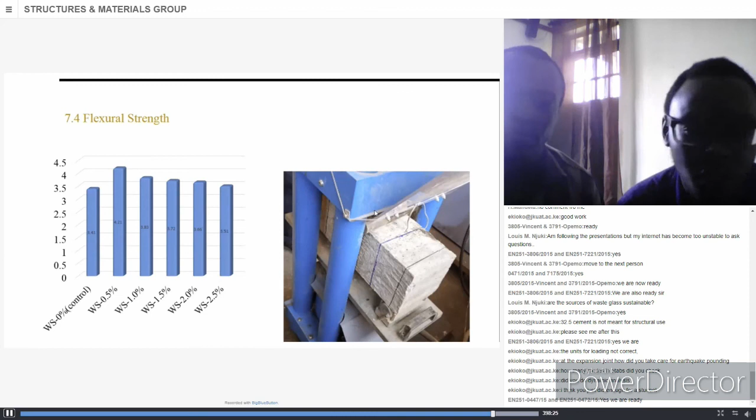In conclusion, we had workability increased from 11 millimeters at 0.5% to 16 millimeters at 2.5% dosage. Tensile and flexural strength increased with an optimum of 2.17 MPa at 0.5%, and also flexure of 4.21 MPa at 0.5% dosage. The compressive strength of concrete reduced by 1.02 MPa at the optimum percentage. The optimum quantity of wheat straw required for suitable strength of concrete was established at 0.5%.

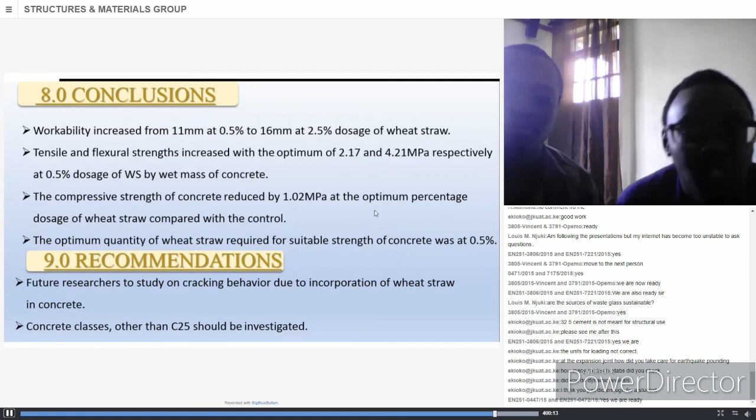Now to the recommendations, we had limitations. From the limitations, we see that we were not able to study the cracking behavior due to incorporation of wheat straw. Therefore, we recommend that future researchers take more time so that they can observe this cracking behavior, and also the durability of the concrete, as our timeline was limited. We were not able to perform the durability effect of use of wheat straw fiber on the properties of concrete. We are also limited to class 25 concrete only, and therefore research should be done on the usage of this wheat straw on other concrete mixes, other classes of concrete, so that we can come up with a better analysis of this straw fiber on the properties of concrete.

Thank you all for listening.

All right, okay, thank you. You have spent 9 minutes. That's a lengthy presentation.

Question from the panel members? Okay, thank you for your presentation. You can leave. Hey there.